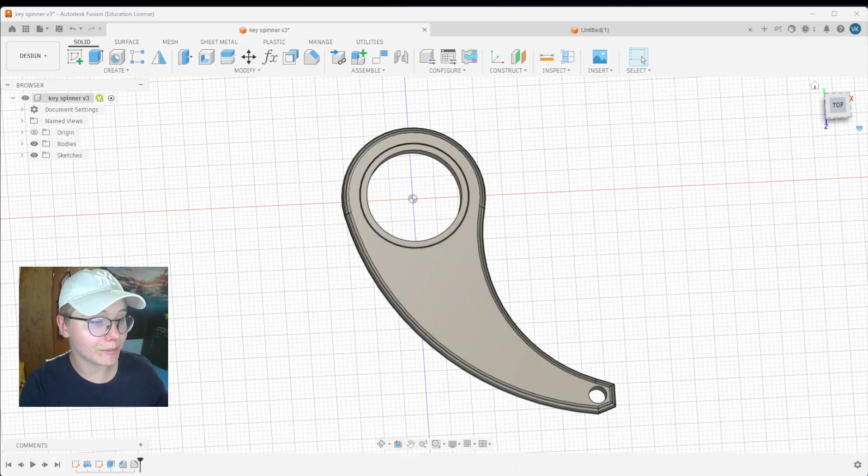If you would like to design a print-in-place key spinner that has a living hinge inside of it, inside of Fusion 360 in just a matter of a few minutes, here's exactly how to do it. I'm gonna keep it a bit more fast-paced since I got a few comments or feedback in my last videos that the videos were a bit too slow and going over the basics a bit too much, so I'm gonna try to keep it a bit more experienced for the guys so that it doesn't get boring.

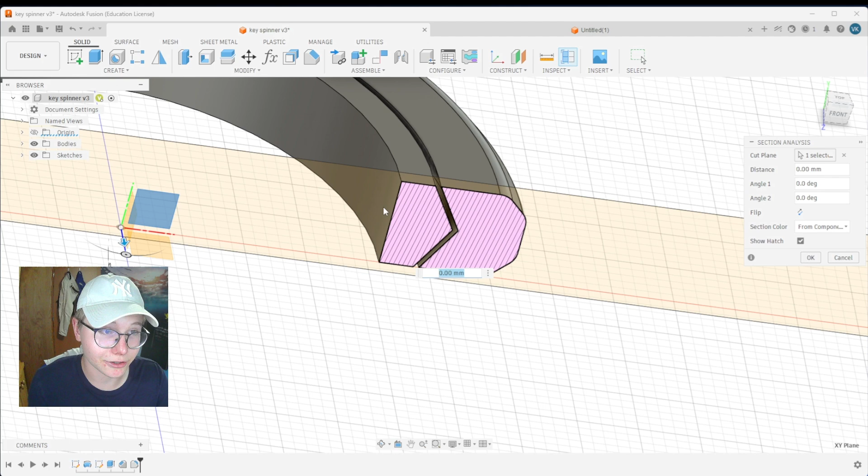Okay, so first of all, we basically need to create the hinge body, so we need to make two bodies, the inner circle and the outer circle, that have a bit of space in between them, which then creates the movement. So let's start a completely new design. Click the create sketch, then we can just select the vertical plane, then make a rectangle that is basically the outline of the body.

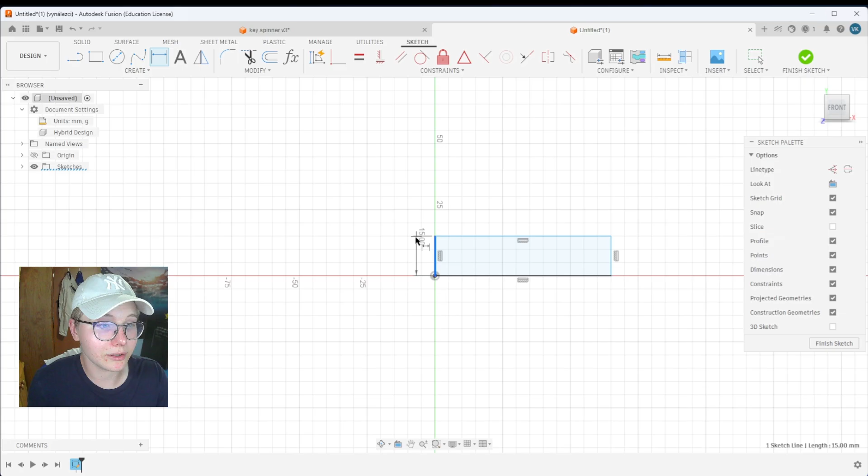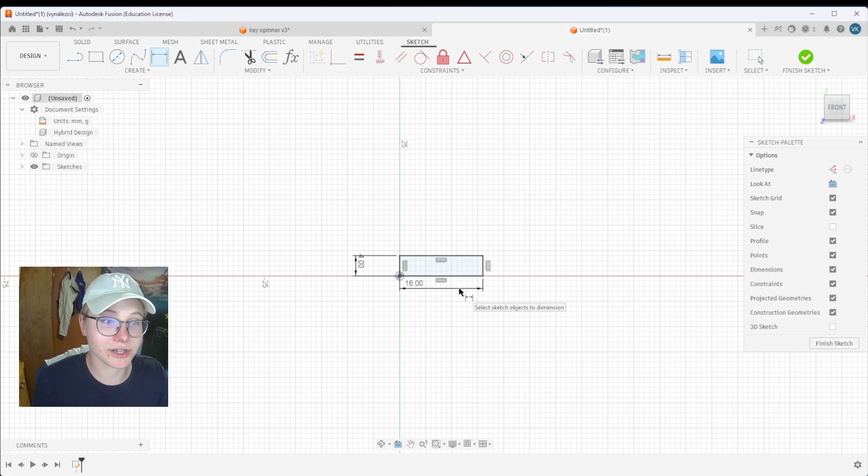Now this vertical line will be dimensioned as 4 millimeters, which is a thickness that I found just works the best because it isn't too small to break, but it is high enough to actually work and fit inside of your pocket. And then this length will be 16 because we will be revolving it. It will actually double, so this is just the radius, not the diameter. So here's how it looks dimensioned, 16 and 4.

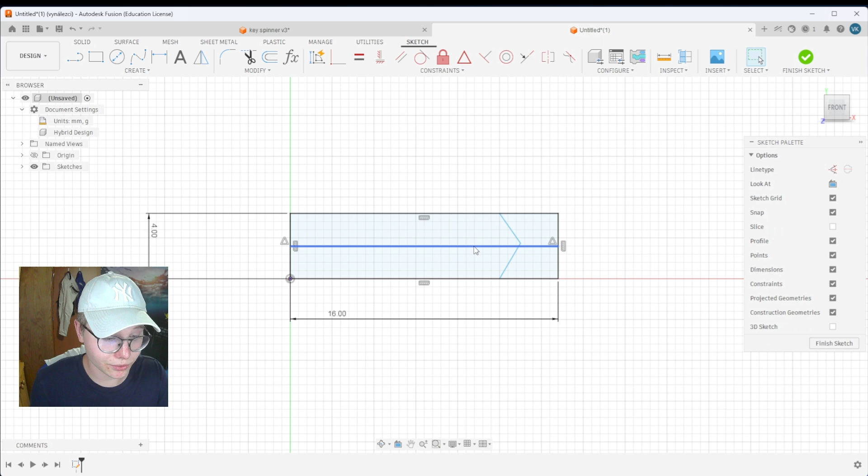And now let's just make the living hinge. So again, click L for the line tool and make basically the shape for the hinge. Then make a line that goes through the middle of the rectangle. That basically is just a construction line. So click on it and click on X, which makes it construction, so that we can only use it to work with it. Once you have that, you can click on the coincident constraint.

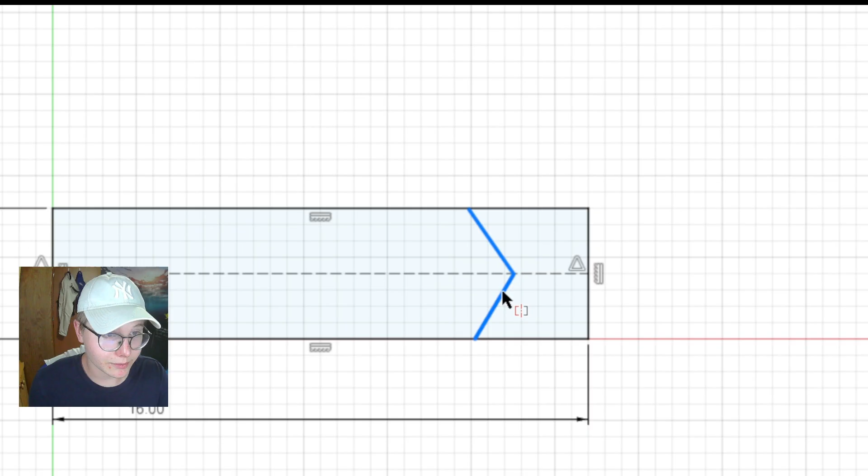Once you click on it, you need this point to be coincident on this line. Once you do that, it's straight up on there, and then we need it to be symmetrical as well. So just make these two lines symmetrical across this construction line that we made. That's why it's so important to have it there, right? Yeah, so now as you can see, we have this first line created.

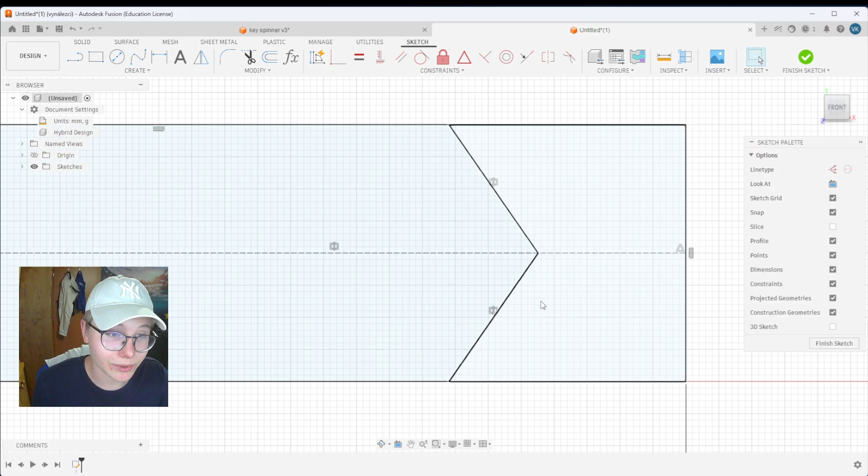Now to make it printable, we of course know that the angle cannot be lower than 45 degrees because otherwise the printer cannot really do it. So we need to dimension this line and make it anything higher than 45 degrees, but I really like using 60 degrees because it gives it a bit better print quality, so it even feels a bit more premium of a print.

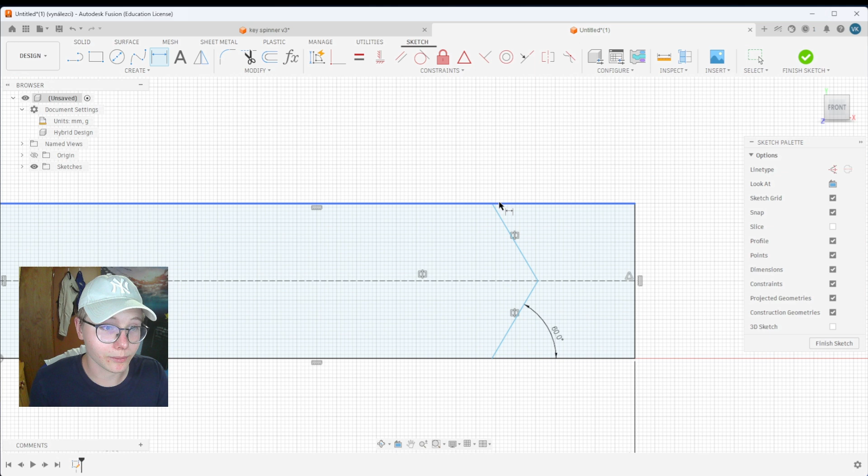Then make the dimension for the wall thickness, which is from this point to this point right over here, which I would set to 4 millimeters, for the hinge that I created. If you want to make the ring a bit bigger, you of course can. So that's just the outer ring as I showed you before, and now we need to make the inner ring. To do that, we can just offset the ring that we already have there.

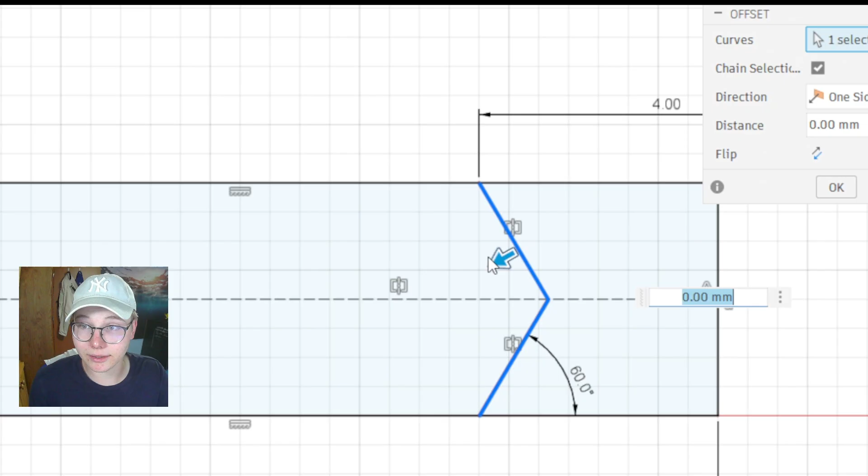So click on the offset tool, then just select this line or double line that we already have there, and then make the clearance. This is basically the space between the two rings. Now if you want, you should definitely watch this video on clearances that I made, because we are making a clearance that will be on both sides. We need a clearance for moving.

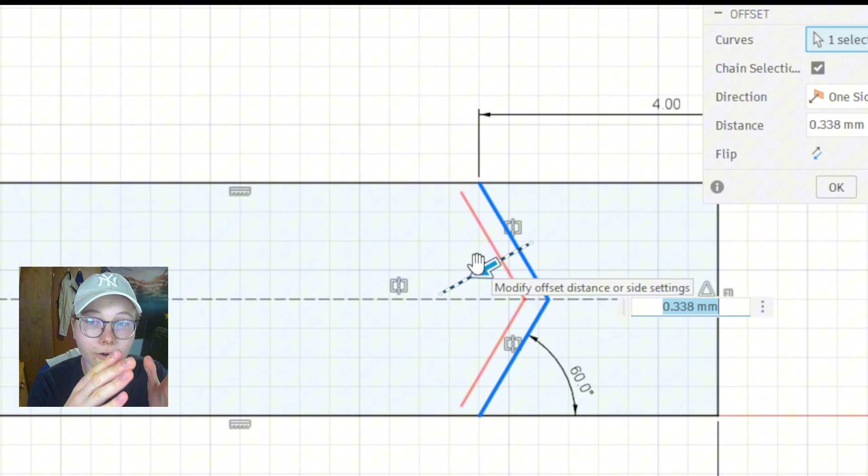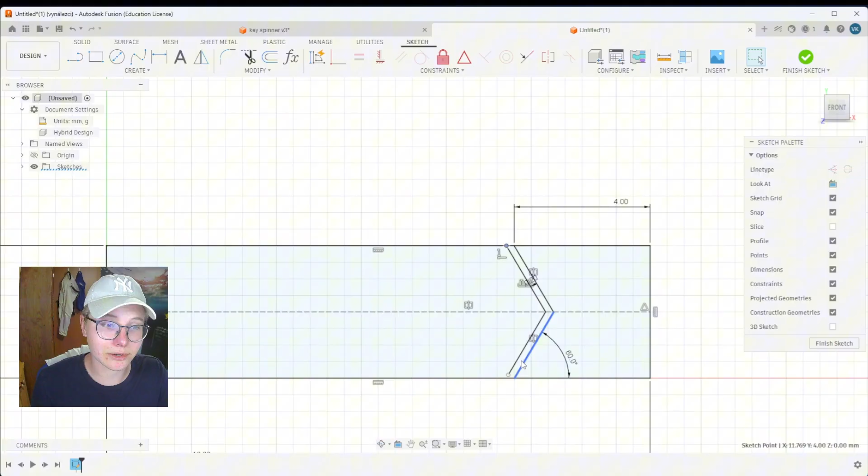For moving, a clearance is 0.4 millimeters, but because it's on both sides, we need to add only half of it because it will double in the final result. So over here you can just input 0.2, which doubles to 0.4 on both sides. But as you can see right now, it isn't fully touching it. So you can either just stretch it and make sure that it snaps to the line, or you can again use the coincident constraint. Make sure it's done on both sides.

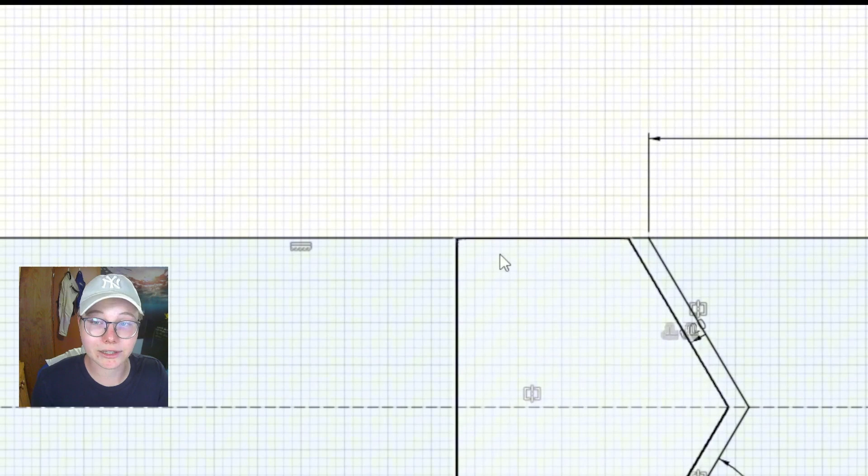Once you have that, you have the first line of the second body created, and now just to finish the body, again select the line tool. As you can see, I have it in my mouse, and then just make sure that you are going at a right angle to the lines that you already have created, so that it's actually straight, not anyhow bent.

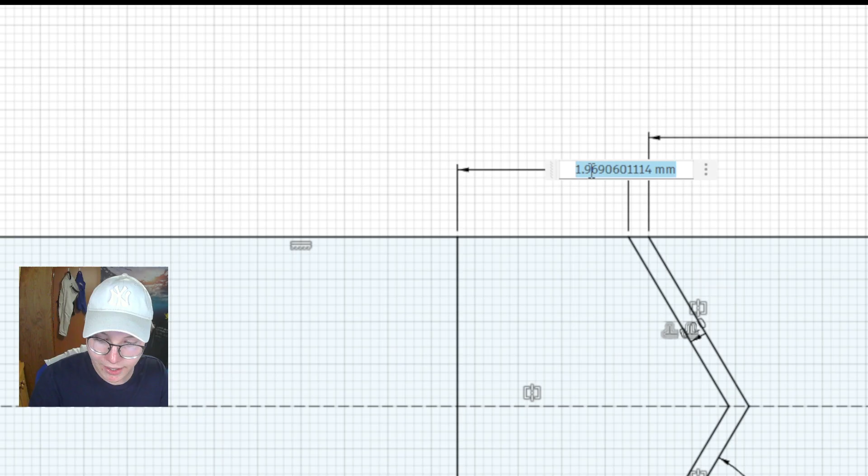And now you can just dimension and basically make the wall thickness by doing it like this. And I found that this 1.4 is actually something that gives it a nice wall thickness and makes a great living hinge in the end result. Now this is really everything for the first sketch. Now we can just start revolving this profile of sketch that we created after you click finish sketch.

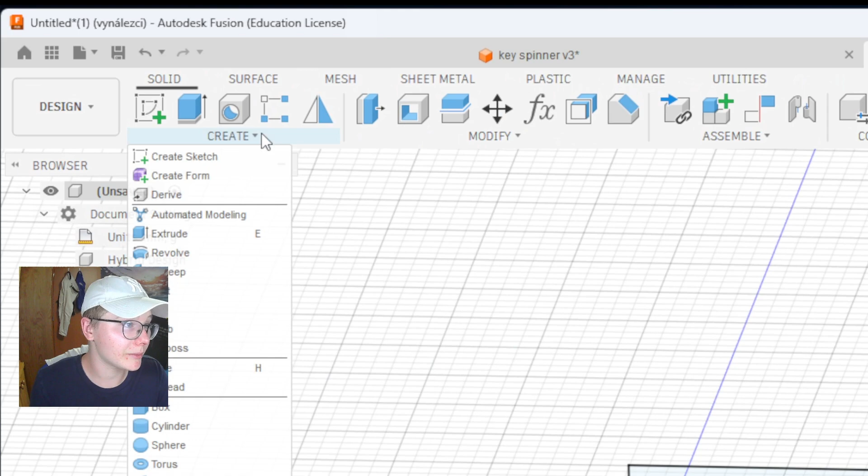So go in the create menu, select revolve. Once you select it, you can just select the two profiles. Because they are separated by the clearance, it will actually create two bodies instead of one. And as the axis, you can just select the one that is vertical. And as you can see, it makes the full living hinge. So just click on OK.

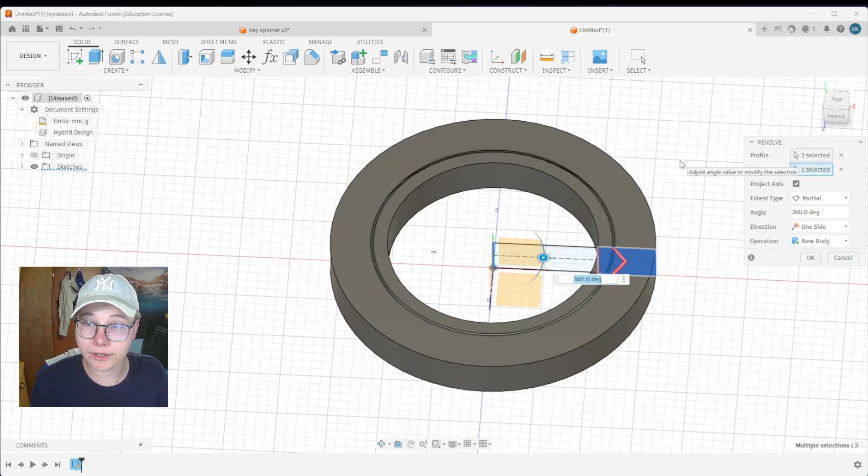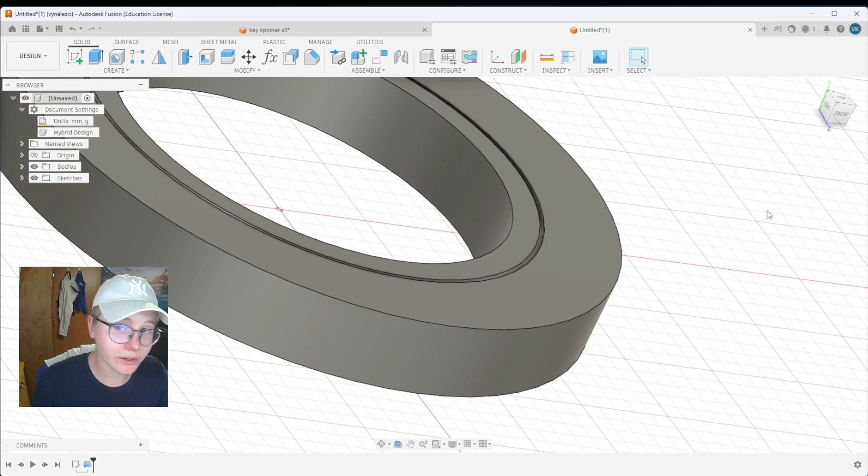If you want to see what is actually happening, you can see that over here it's creating the revolve feature, creating the two profiles and making space between them, and that's why it then is able to spin and actually have enough space to spin and create the living hinge that then allows it to move freely and do the keychain fun part.

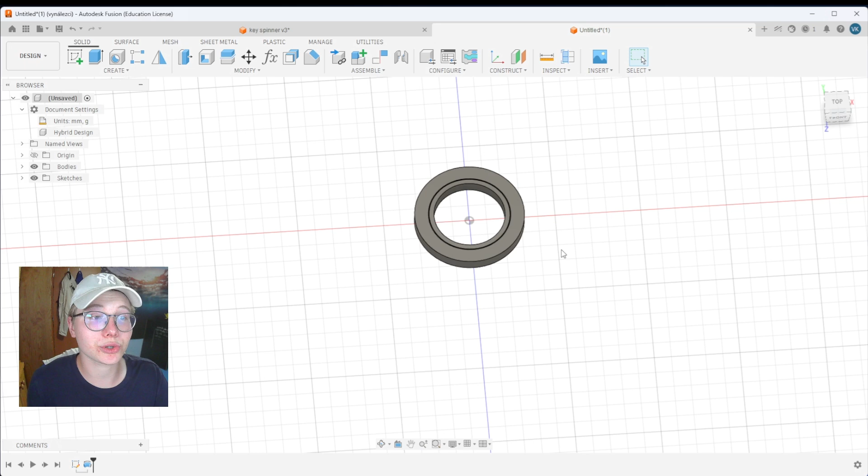So once you have the main hinge created, we can now start sketching the body. Now this is really something that you can completely go wild on your own, but I'm just gonna make what I did. So I'm gonna show you my values and everything that I did. So start a new sketch on top of the face of the living hinge, as you can see right over here. And now what I did was I created two arcs.

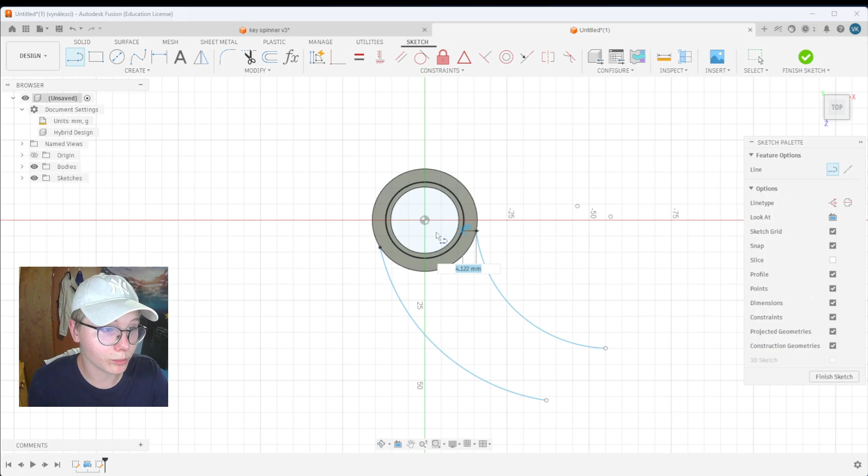This is just a shape that I had in mind when I was creating it, so you can do anything you want really over here. Go as fun as you want. I made these two arcs, then I connected them on both ends with lines. Then because I wanted this line to be horizontal and this line to be vertical, you can just position it a bit so that Fusion knows what you're trying to achieve.

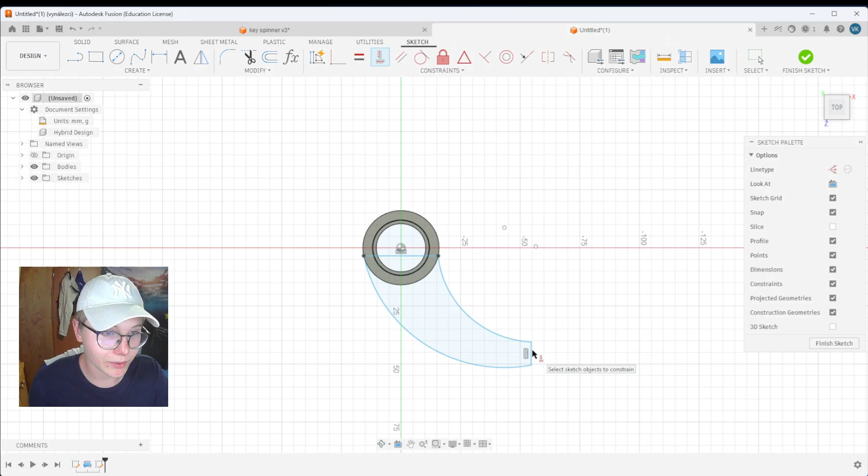Then go in the constraint and click on the horizontal tool. And once you have it in hand, you can just click on the first one and then on the second one, and both of them will be constrained as you need them. This one will be horizontal, this one will be vertical.

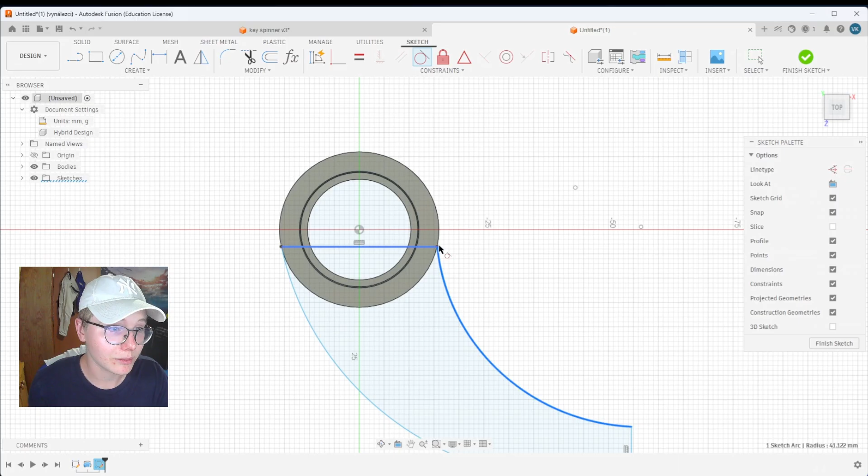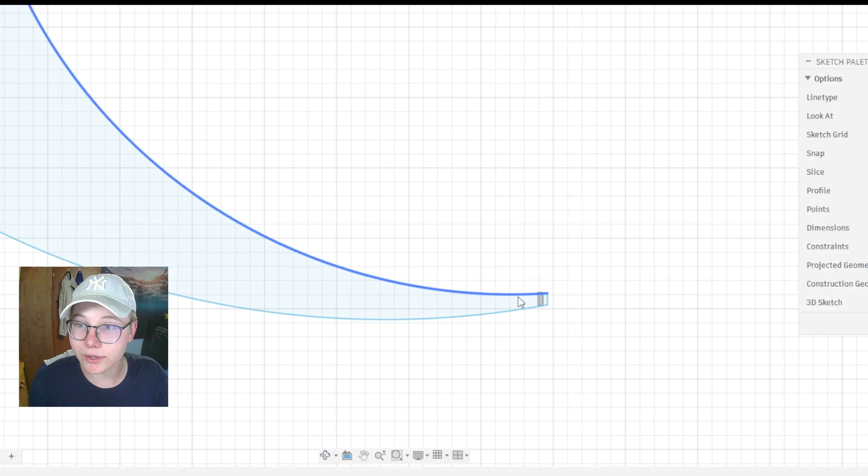Now, for the curve of the hinge to be actually smooth for the arcs, you need to constrain it tangentially. So that's this one right over here. So tangent, make sure that both of them are tangent to the body. Once you do that, you actually have the most basic shape created. And now you can just go over here, and now we need to design the hole for the keychain to even go in. So now this is perfect.

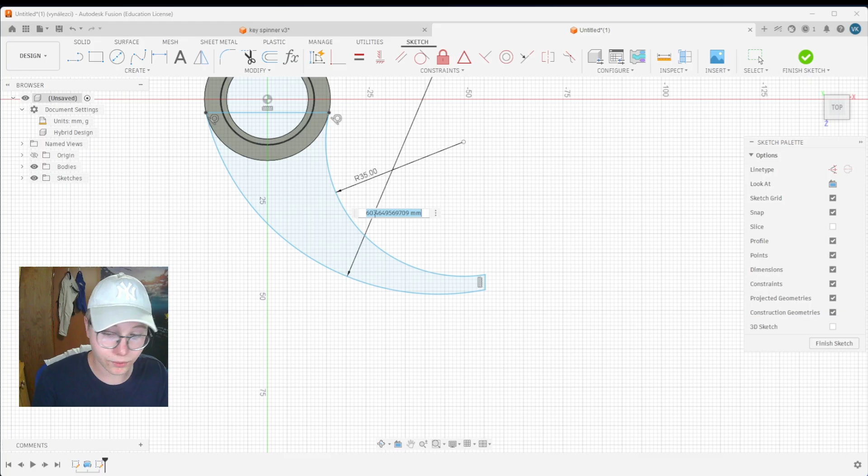Now the radiuses that I chose over here are 35 for the inner one, and then 63 for the outer one. You can always edit these values completely to yourself, and then just make the hole, so just a circle in the middle of it, stretch it out.

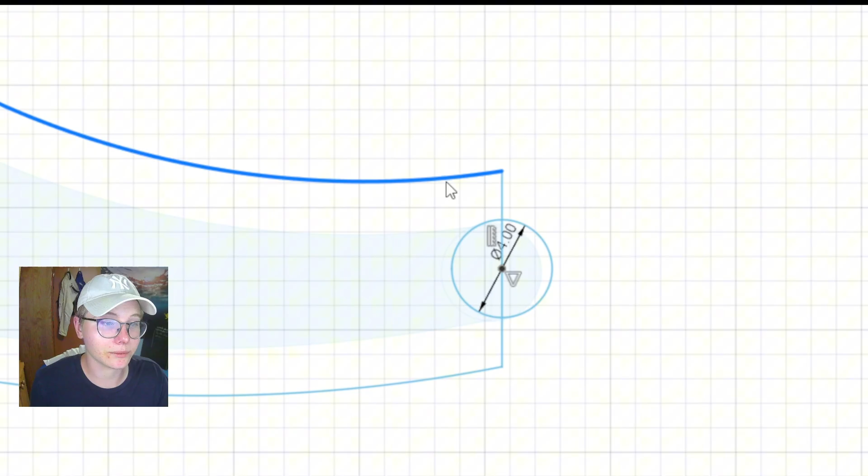I made it 4 millimeters because that's a value that I found that my keys need to even fit inside of there. And then I just made a really simple shape to surround the hole so that it would be surrounded with some kind of material. Right now it looks very stupid, but I will edit it right quickly.

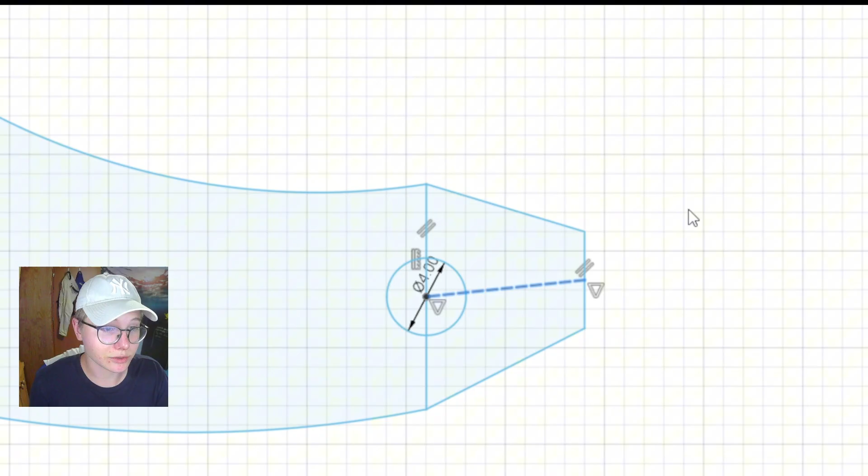Make this, click on it, make it construction by clicking X, then just make it horizontal or vertical, go down there, click on it so that, as you can see, right now it's horizontal, perfect. And now I can just make the angle.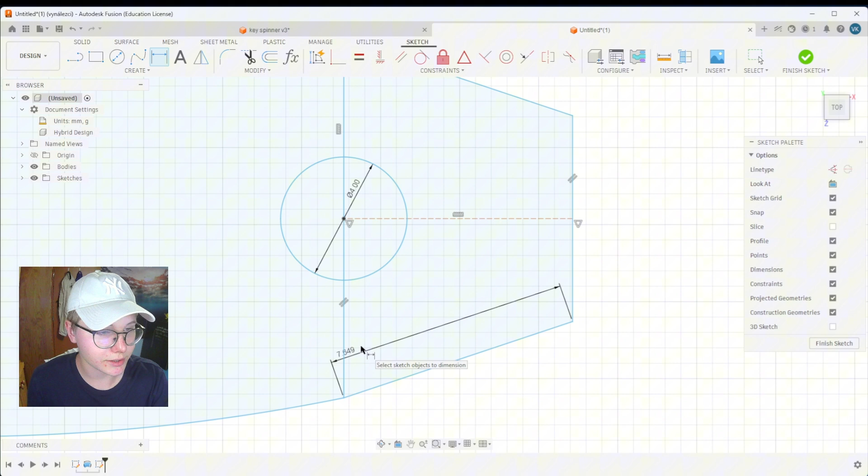I really like the angle of 70 degrees, or sorry, I dimensioned the wrong dimension, so you can select these two lines and select 70 degrees, and then just make it basically symmetrical with the constraint so that it actually looks as if it was designed with intent.

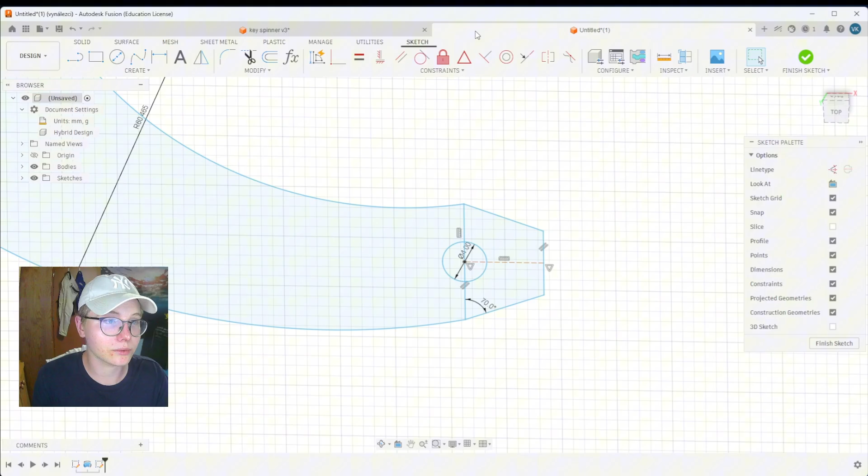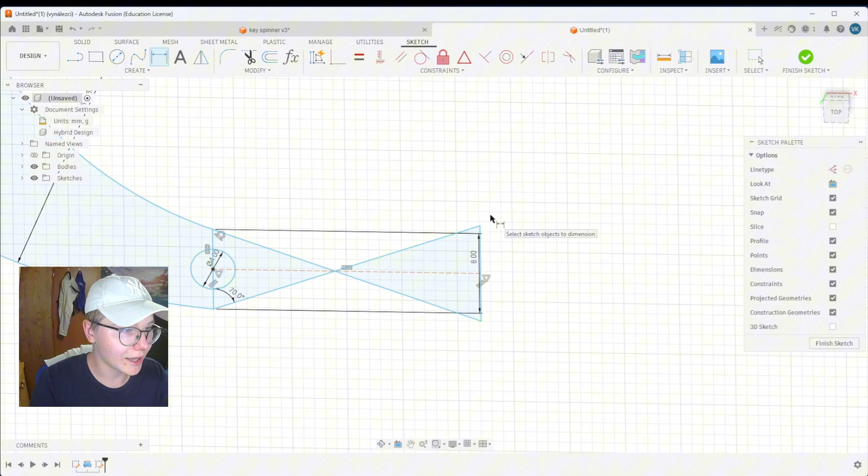And then I wanted also to make this arc tangent to this line right over here. So again, select the constraint, make it tangent, and as you can see, it just screws up the sketch a bit, but you can always drag it out of the misery. As you can see, it stretched out this line a bit too much, so we can just constrain it. I want it to be 8 millimeters, and then of course it even screwed up the height, so you can again dimension it to be something that you want. For example, I want 4 millimeters.

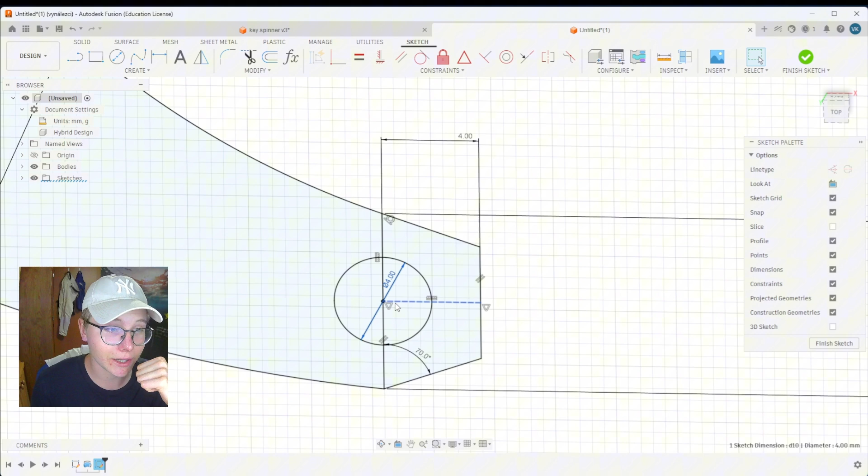I'm going to explain really quickly why. Because I want at least the wall thickness of 2 millimeters. And if I give this 4 and this diameter is 4, that means the radius is 2. So from this point to this point right over here, it's 2, and then to the height, it's 2 as well.

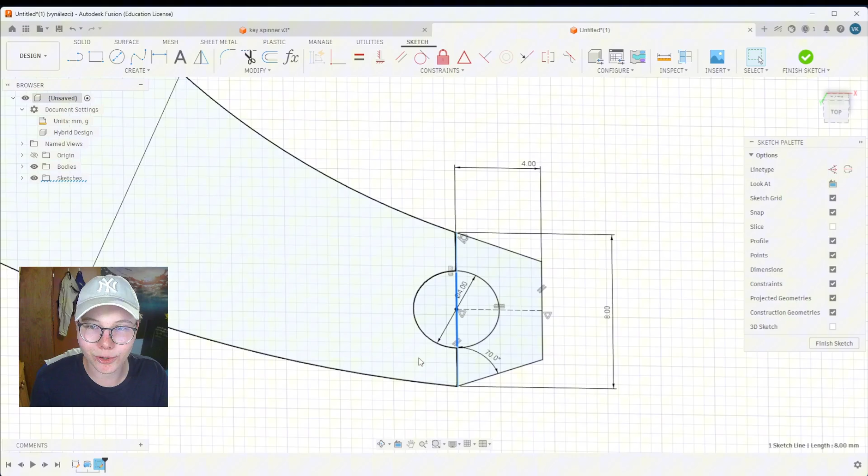And the 8 that I did over here is because I want also the consistent wall thickness of 2. So from this point to this point, it's 2, then it's 4, and then it's 2 again. So that's complete 8, of course, so that it's the wall thickness of 2 alongside the whole design. That's what really gives it the consistent wall thickness, which is always nice to have.

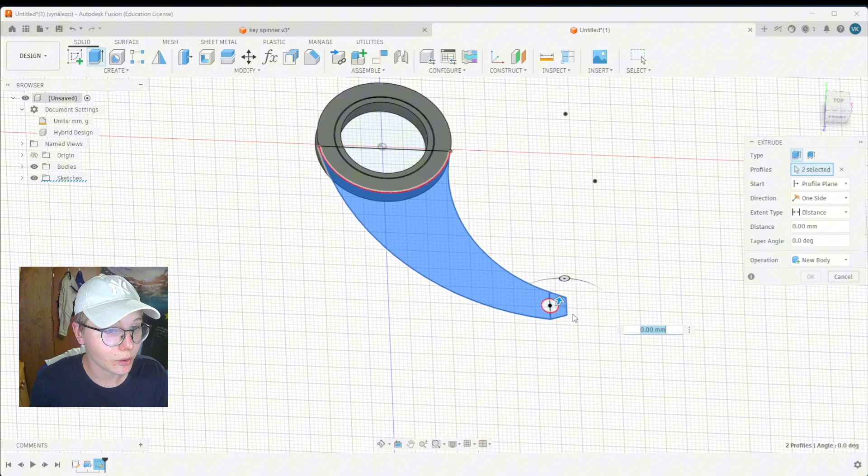Now once you have this, that's basically the whole design of the body. Then you can just click on E as extrude, click on the two bodies. Once you click on them, you can just turn it around so you can see on the other side, because we want it to extrude to this body down here. You can go in the extrude menu and select the extent type to an object, and then just click the bottom of the hinge and it will extrude it straight up there. And once you click OK, you have even the body in there.

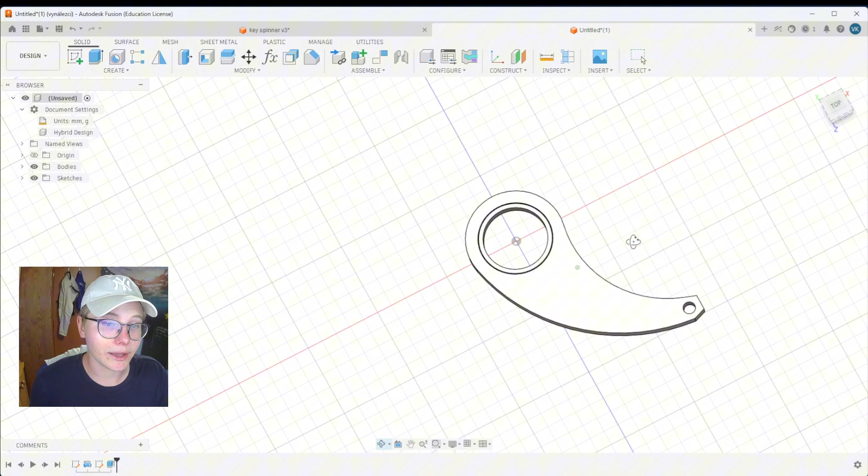And now all you basically need to do is just give it a bit of chamfers. Chamfers are always good to add because first of all, they remove the possible problem of elephant foot, and it even makes it look a lot better because there won't be these very sharp edges, and even easier for the printer to do. And it looks nicer, of course.

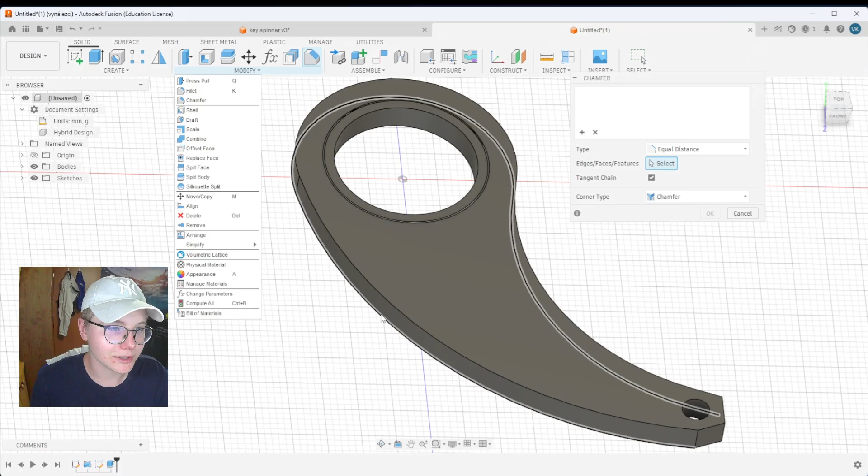So go into modify section, select chamfers, and what I did is I just selected the edges of the whole key spinner, and then just put a chamfer of 1, which as you can see gives it this nice surface finish. And then if you really want to go expensive, you can even fillet it to make it seem even better, but I think that this is really just as good as it can get.

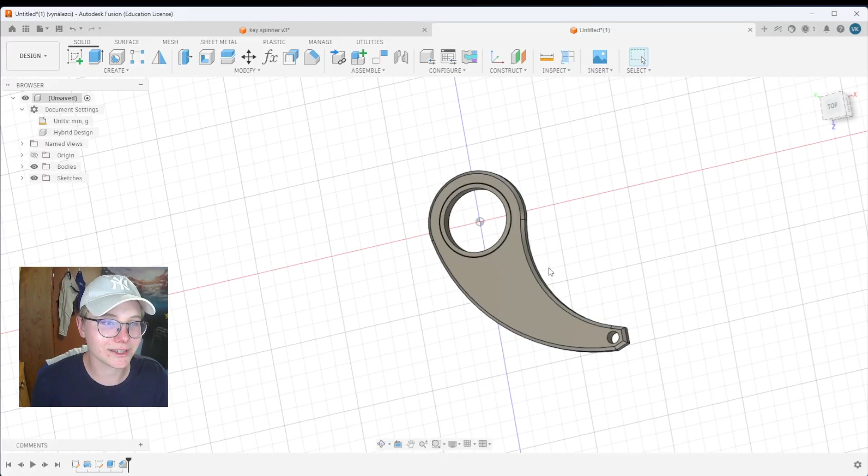And now when you're here, you can just print it out, see what it can do, and then always just go in the first sketch or in the second one, edit it as you want, make it completely custom. And hopefully this guide was helpful for you to make a key spinner just like this.